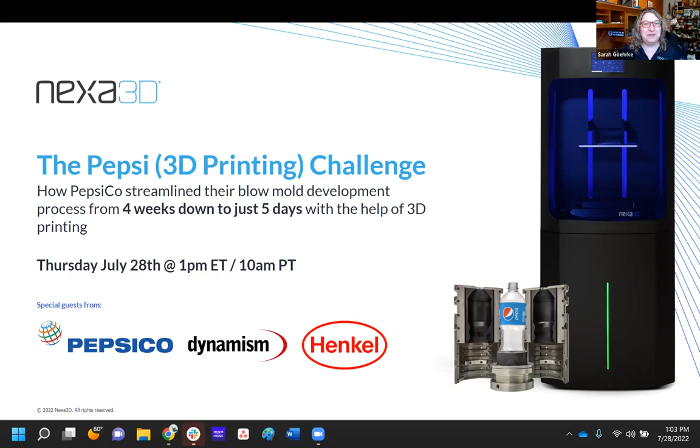So before we get too deeply into the slides, I'm going to stop sharing and draw your attention to the people joining us live on the screen. And I'd love to invite all of our panelists to introduce themselves. So why don't we start with the team from PepsiCo. Max, Thangthip, would you please introduce yourselves and your company?

Sure. So good morning, good afternoon, good evening, everybody. I see a lot of people from all over the world, which is great. My name is Max Rodriguez. I lead the Advanced Engineering and Design team, part of the Global Beverages R&D group located in Valhalla, New York. And just a very quick introduction about PepsiCo: I think everybody knows the company, but again, we're a $79 billion net revenue company with over 335,000 employees, with the presence in over 200 countries and many, many billion-dollar brands. I'm sure some of them are even your favorites.

And with that, I'll pass it over to my colleague, Thangthip. Thanks, Max. Thanks everyone for joining today. So my name is Thangthip T. Cannell. I'm a part of Max's team, leading the advanced rapid prototyping pillar as a packaging engineer. And within this team, our focus is looking at new and emerging technologies within additive to really fast track and accelerate our package development process, which you will learn a little bit more later in this webinar.

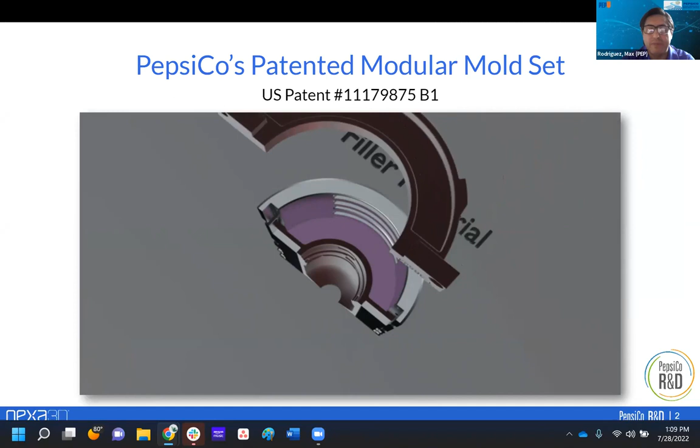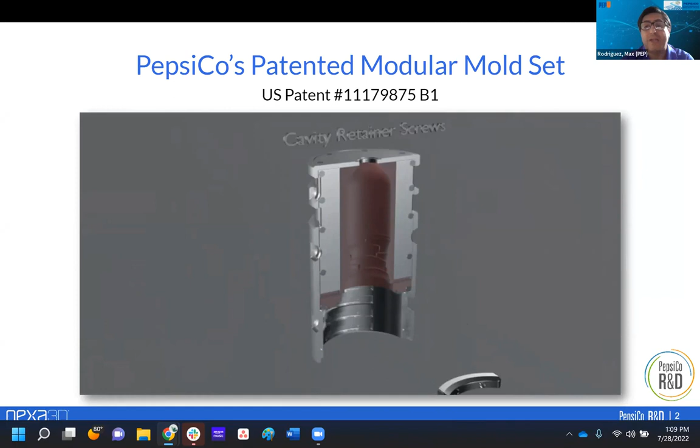I could take that question. So in the past, if we compare it to the past, the way that we did package development, normally we would be working with our industrial design team and looking at several concepts which emanate from consumer insights to a sketch, to ultimately CAD designs and multiple iterations. But you need to actually put it into the hands of our critical stakeholders before we go into manufacturing. And that can often take time, sometimes even months, with a development cycle leading into 12 months to 18 months in our normal operations.

So anything that you can do to try to reduce that process by getting decisions earlier on, by getting the physical samples in the hands of those critical stakeholders is a significant benefit, because it speeds our capability to get to market quicker and ultimately gives us a competitive edge.

It's just really cool. It might not be the most technical term for it, but it's really cool.

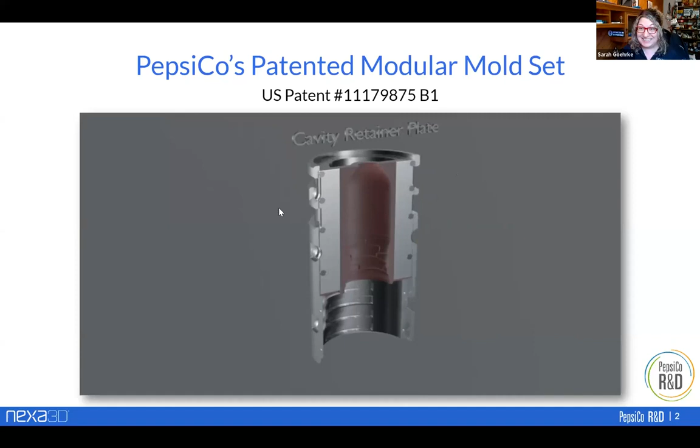So you developed a patented modular mold design system. Can we walk through a little bit what that looks like for PepsiCo and why it's important to companies like PepsiCo that might be doing things like relatively frequent product design? I'm going to scoot over here to the next bit of the workflow, and I'd love it if you would both be able to take us through this.

Yeah, so in terms of our workflow, we use a variety of interlacing technologies to really fast track that process to get us to a product by day 5.

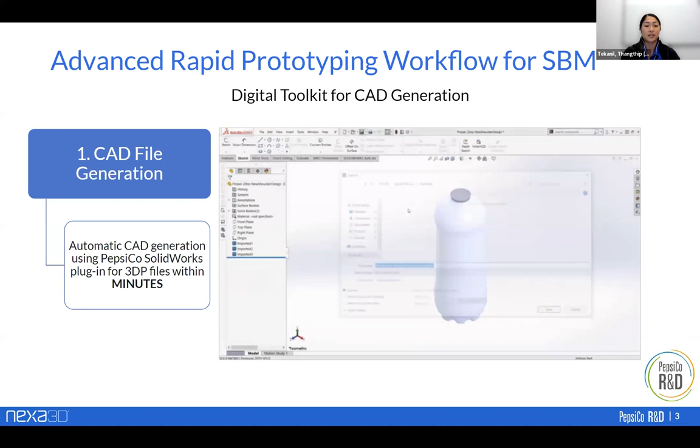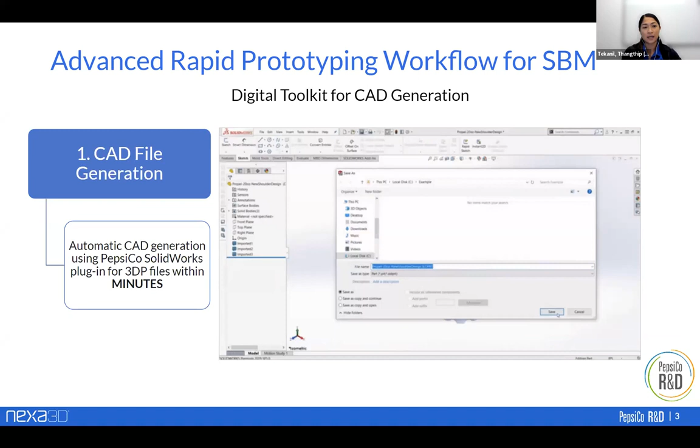So what we're looking at here is our CAD generation toolkit for automating the process of creating the 3D CAD models. This is a plugin within SolidWorks that we've designed and engineered to be user friendly, so that anyone with minimal SolidWorks expertise can go in and run this plugin in a matter of minutes. We've moved from manually creating CAD models and prepping them for printing to fully automating that process for generating the CAD models for printing.

If we move into the next bit of the workflow, we see something interesting here. In parallel, to meet that 5-day timeline, we also utilize simulation software, in this case stretch blow molding simulations, to conduct hundreds of cases of DOEs for varying process conditions. By day 3, we're able to get a baseline recipe ready for blow molding, and in the meantime the parts are printed and then assembled into the mold kit.

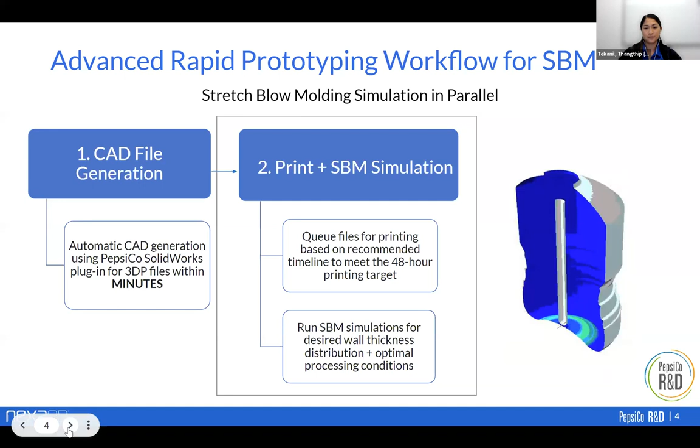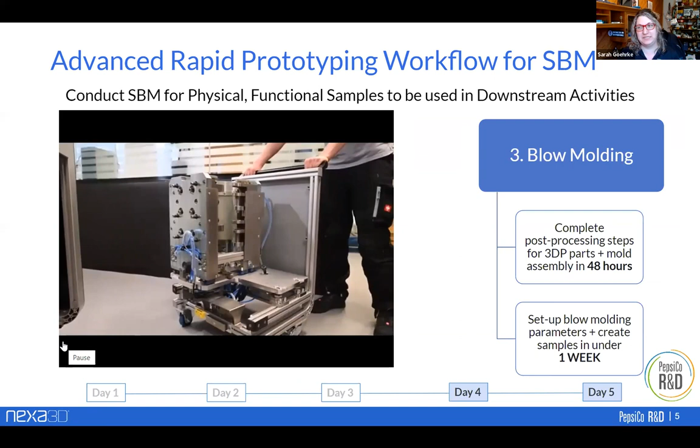Moving forward, we see even more of the workflow going on here. So I'm going to take just a minute to highlight this video that you at PepsiCo have shared with us about what the entire process looks like. Would you be able to walk us through this a little bit? What are we seeing?

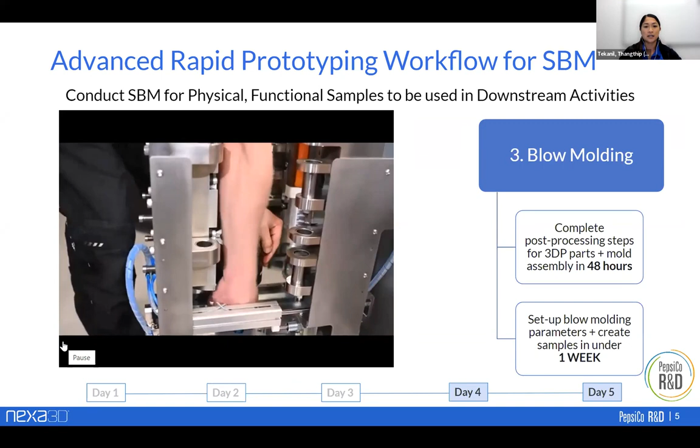Yeah, so this video showcases our toolkit that was designed in development with our business partner BMT. It mates perfectly with our modular mold set as well as conventional metal molds. As you can see here, the assembly and disassembly of the mold is fairly straightforward.

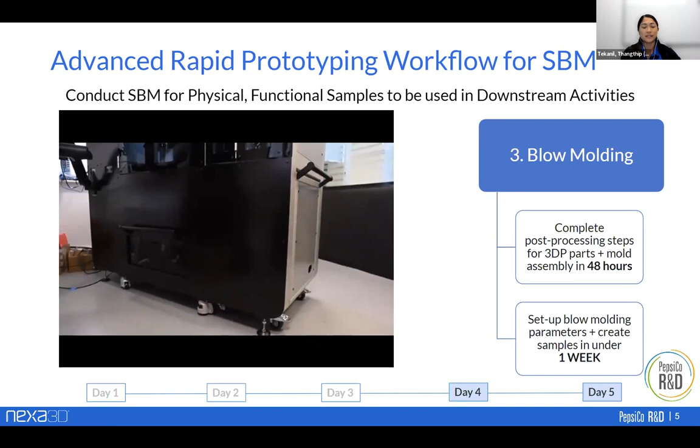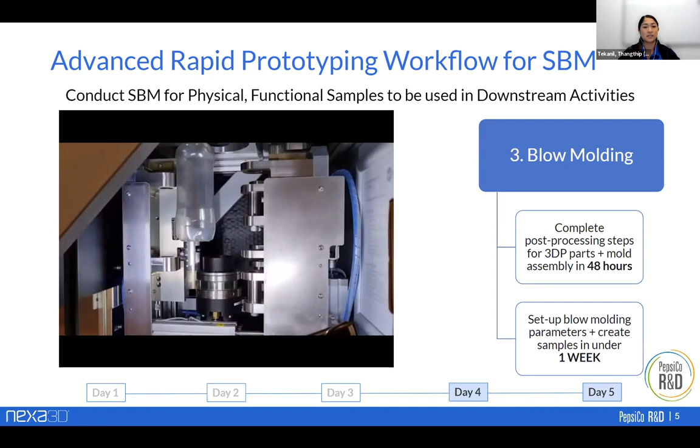So by day 3 and 4, we have a fully assembled mold set with a baseline recipe to start with, and then we get into blow molding the actual bottles. These are fully functional samples, so we're able to fill, cap, and then use these for physical testing as well as downstream activities such as line convey, vent testing, things like that.

Awesome. And we'll pause there for a second because I know that PepsiCo patented this process. It's a really cool process that you developed in-house to solve all of the problems and challenges you were seeing, and how to really break into that area of new product design for such a busy global company. We know everything you've done has been in your best interests, and you had to evaluate a lot of technologies to get where you landed today. Can you tell us a little bit about what that process was like? I'd also love to hear from Dynamism, from Hratch, what the process looked like from your perspective. As you worked with PepsiCo, how did that relationship develop and evolve, and bring us to where we are today in evaluating and validating designs?

Yes, Pepsi had reached out to us early in 2021, at the beginning of the year. They presented us with some of the challenges they were experiencing during that time. Obviously, the biggest criteria was the material need, as well as the build platform and print speed. It was pretty easy to narrow down the option and go directly to Nexa, where we were able to provide the largest build platform in the resin industry, as well as bringing in the Loctite XPEEK material to complete the whole package.

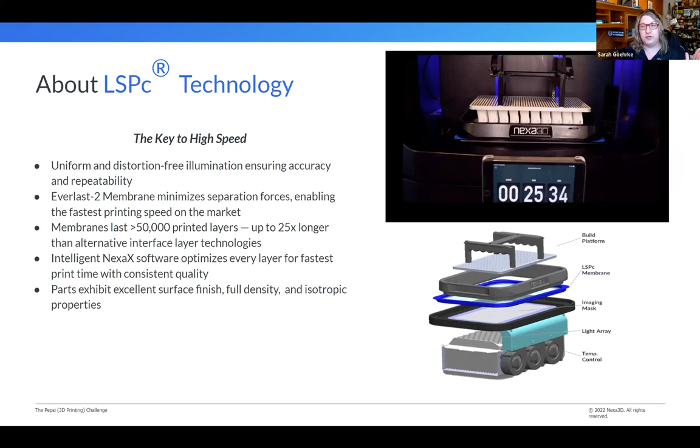But the actual throughput is this full end-to-end process, and that's where we really need to focus. End-to-end means identify, evaluate, prepare, produce, wash, and cure. We can't ignore any step throughout this process. There's really a very lengthy process that informs everything additive manufacturing is today.

And it's that end-to-end process - you need these different factors when you actually look into that math. If you check out nexa3d.com really soon, you'll see our 20x productivity white paper, because it's about time - that's what we really offer you. That 20x comes in through the math worked out from print speed, build volume, the wash time and the cure time, and then getting your actual finished part off the line.

And so when we look at everything that was able to come together here for PepsiCo, what came into play was that larger build volume, having that industrial capability with an ultra fast print speed, with that end-to-end wash and cure everything mode coming in. Hratch, you and your team at Dynamism were really able to exemplify what that could bring to the team at PepsiCo.

And we really value the thoroughness of evaluation that you were able to bring to the table, because we want you to look at your options. We want you to see what else is out there.

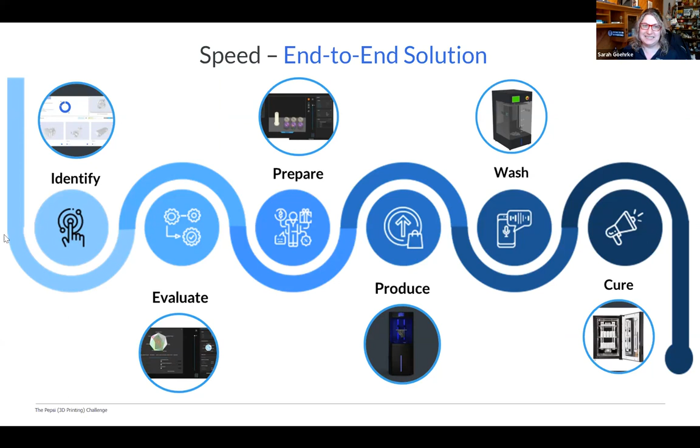I'll leave it to you if you want to talk a little bit about the materials and processes you worked with, and we'll leave room for that. But one thing that's really special about what we're talking about today is the entire platform you were able to bring together, and what Hratch and his team at Dynamism were able to sink in. And that includes our materials partner at Henkel Loctite.

So Sam, the material in question today for this particular application is XPEEK147. What is it? What does that mean? Sure, so XPEEK147 is essentially our high HDT resin.

As you see on the slide, we publish an HDT of 238C, and actually, just to let everybody know, through some additional ASTM testing, we're now recertifying up to 290C. So really, what I think makes this product quite unique is it's one of the highest HDT one-component materials—there's no mixing, you essentially use it just as a one component material. You'll see it has good tensile strength, Young's modulus, a low elongation, and what really makes it unique is also a low water absorption and good low coefficient of expansion.

So we've seen a lot of success in these types of molding applications. And through the work we've done with Nexa in really optimizing a workflow, we're able to guarantee that a customer can achieve these results with wonderful print definition. My assumption is that something the Pepsi team really liked is that through their design iterations, they're getting really good definition of detail, which comes with the uniqueness of the printer and the way our two teams, Nexa and Henkel, have worked together to optimize the process. So good dimensional stability, good surface finish, and my guess is the high HDT is really what stood out for this application.

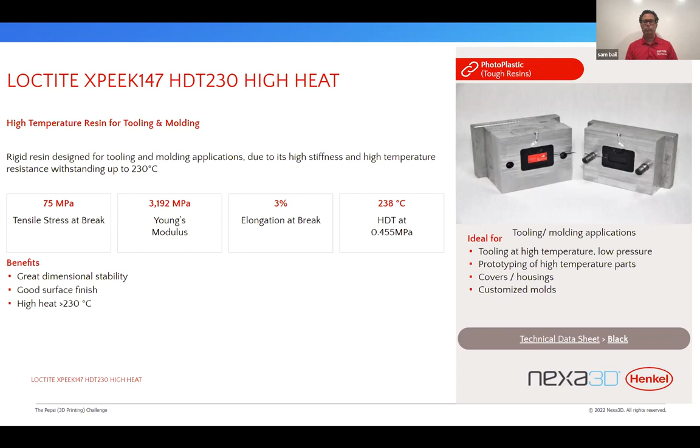As you see in the picture, this is actually a similar application where mold sets are printed for low pressure injection molding. This is an application for a Henkel material we use for injecting a polyamide material—we call it Technomelt, where you overmold electronics. Same thing, we've printed the mold set. So I think that's really what makes this product unique, and my assumption why it was selected by Dynamism and Pepsi for the application.

I love that. Sam, if I could just pick your brain for a minute here while I have you. Okay, we all have you. XPEEK147 is a really interesting material.

Can we go a little bit into its genesis, the material itself? Why was it brought to market? Was it applications like this? Did you kind of see in your crystal ball that companies like PepsiCo would be needing a high heat mold material? What was it about XPEEK147 that really made this material evolve, come to market, and become relevant for platforms like ours at Nexa 3D?

Sure. Well, I think the genesis of the material is as we were launching different materials, we look across the spectrum of what spaces industrial customers are looking to fill. I think as we all know, people sort of revert back to materials like ABS, traditional plastics, and their unique properties. I think in this case it's interesting that Nexa has aligned this to PEEK, a polyether ether ketone, where you obviously have a product that has low moisture absorption. And again, really the genesis was to develop a high HDT material.

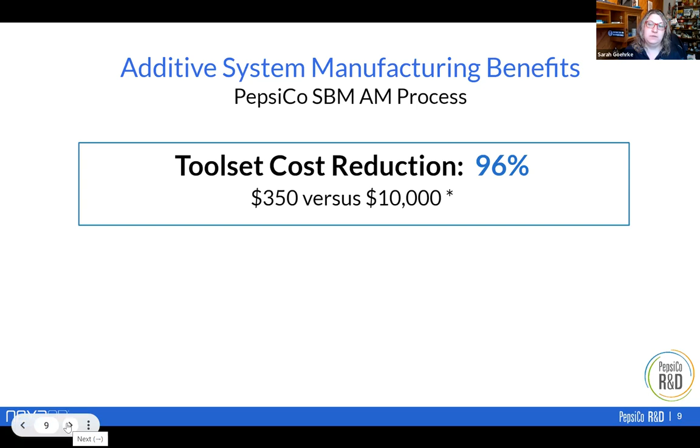And we have another compelling percentage point for you, which is 93% time reduction. Can you speak a little bit to what that means?

Yes, sure. So for us, we go to outside service providers, typically, to manufacture our mold set. From the time we're ready to proceed forward to the time we actually get the molds, it could take about 4 weeks. In comparison, our entire process of 3D printing and assembling the mold is within 48 hours. That's where we've demonstrated a 93% time reduction.

Okay, so Max, when we're talking about that 48 hours, what exactly is included in that? That used to take 4 weeks because there's a lot in there, right?

Yes, absolutely. So it's our internal process of getting our files approved and released to our service provider, our internal process of issuing a PO, their process of getting the metal stock and reserving time in their subtractive manufacturing process, and then the finishing step, polishing, and all of that, which takes quite a bit of time.

And you could possibly reduce that if you look at the administrative tasks, but even with that reduction, you cannot meet the internal process speed of 3D printing.

So a lot of times when we talk about how 3D printing plays well with other technologies - you know, what is it that they say on report cards? Plays nicely with other kids. When we talk about how 3D printing fits into that kind of report card, a lot of times people want to say that 3D printing is replacing traditional manufacturing, replacing blow molding, injection molding, name a manufacturing technology, right?

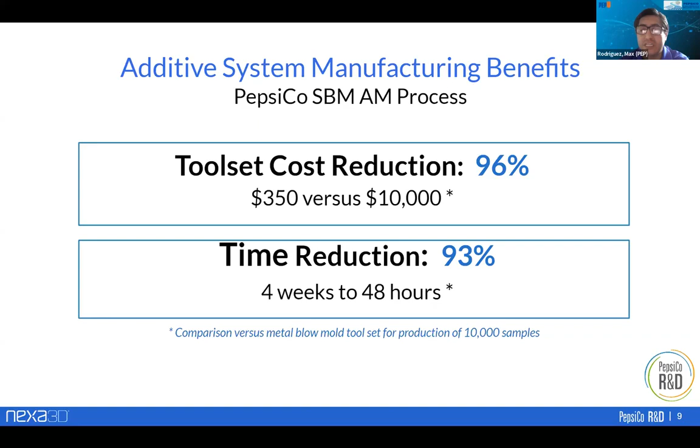You have to look at the way that we've constructed a mold set and how light the parts are that we print. We're printing two shells and a base, so we're not utilizing a significant amount of X PEEK material during our printing process. If we were printing the entire mold, I would say yes, you'd start to get into a significant amount of material cost, but we're only printing what we need—a very slim shell. Then we're filling the void, the metal outer casing and the 3D printed shell, with a very low cost dental stone material—think of it like plaster, but very low cost. So in terms of material costs, we're minimizing the amount of PEEK material we use, and filling it with very low cost material to keep the costs within that $350 range that we quoted.

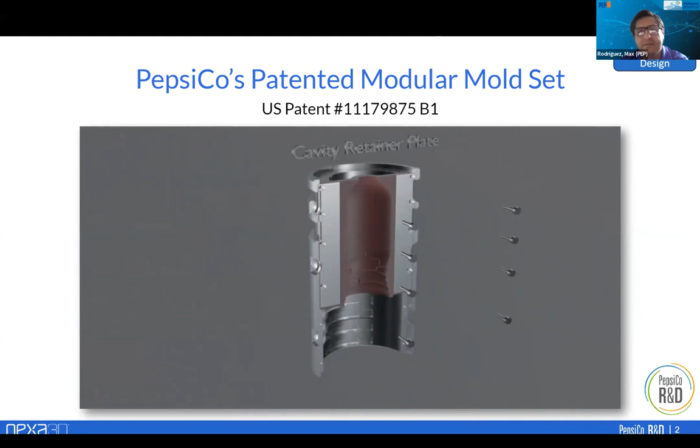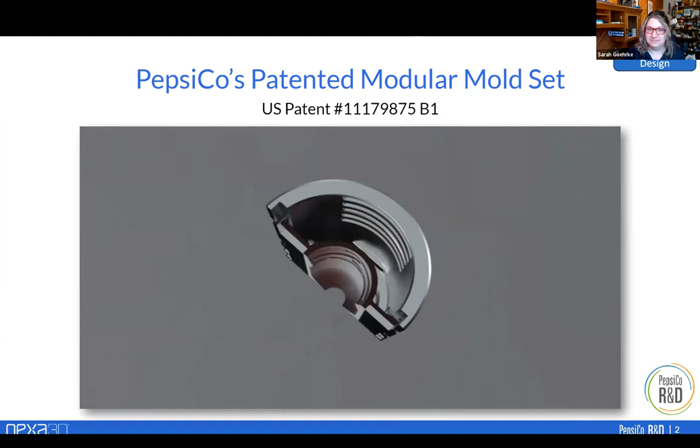Another one that fits right in here, Max and Thangthip: how often are you producing new molds and designs? I'll let Thangthip answer this question, because it's been nonstop, but she's got the numbers for it.

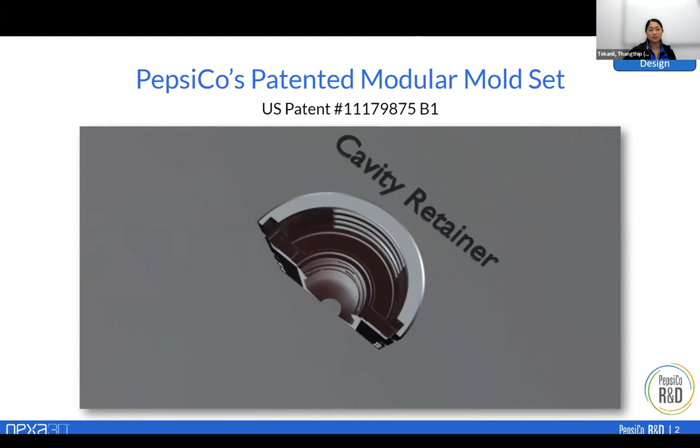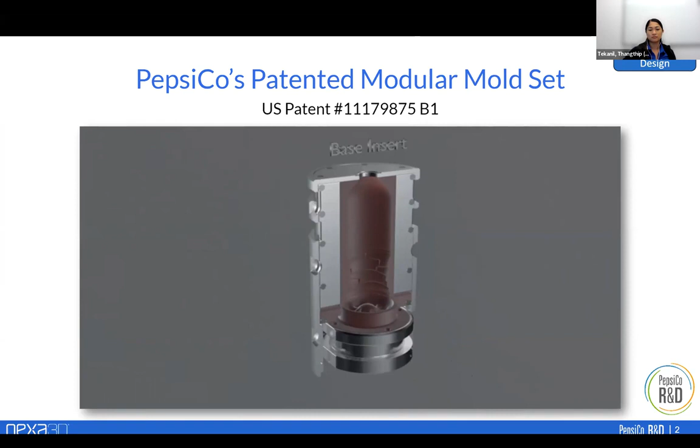Yeah, so it's pretty much been nonstop ever since we got our lab scale blow molder in February. Since then, we've been able to do 8 bottles now, which is something unheard of with our conventional methods of producing molds.

That's pretty substantial, especially for a company like PepsiCo that has so many brands and so many different designs that require so many different bottles, and keeping up with the times is its own thing. For such a busy global company, having all these designs available to do and redo, brands to do and redo, and being able to do 8 at a time, that's notable.

What is the biggest takeaway or learning from Pepsi that you would share with other companies looking to use a hybrid additive manufacturing and subtractive or molding approach for developing tooling?

We take lessons and learnings from different industries. For example, in the injection molding industry, the concept of MUD tooling has been widely used, where you utilize inserts to generate the part. The use of PEEK material is something that's been used in automotive. And even there, we're expanding our capability by looking at increasing the mechanical properties through mechanical electroplating, mechanical coating. So we look at a host of different industries to try to get some inspiration and see what else we can exploit. We rely on industry experts who have a keen eye and a keen pulse of what's happening, like Dynamism, to fill us in on stuff we may not be able to see, because we're end users, not doing this on a day-to-day basis. But yeah, we try to take as many inspirations as possible from other more experienced players.